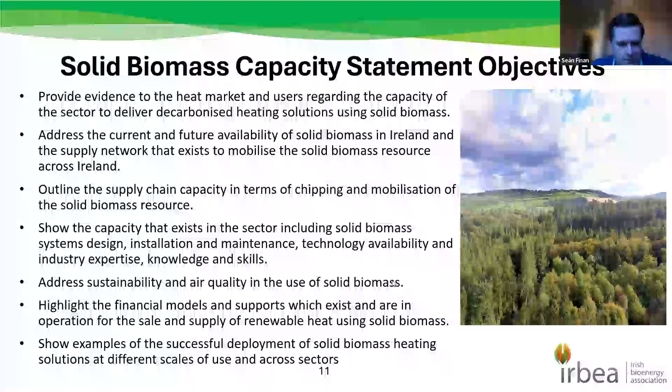The Wood Fuel Quality Assurance Scheme, which is managed and administered by the Irish Bioenergy Association, with NOLA as the auditor, certifies suppliers to ISO 17225. The WFQA requirements satisfy the SSRH, the Support Scheme for Renewable Heat, and the Solid Fuel Regulation requirements. Most recently, IrBEA has engaged with SURE, a German-based certification body, around sustainability certification.

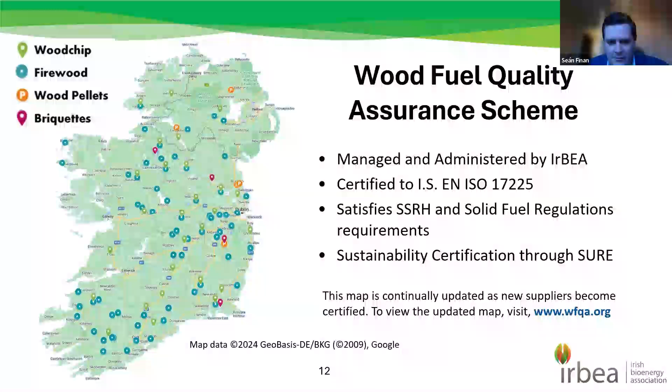It's probably even updated since this was drawn down and put into the slide here. The updated map is available on www.wfqa.org. I'd like to also acknowledge the contribution made by the Department of Agriculture for the promotion of the Wood Fuel Quality Assurance Scheme, and acknowledge that support. Without the department's support, it would not be possible to promote the sector and promote the Wood Fuel Quality Assurance Scheme.

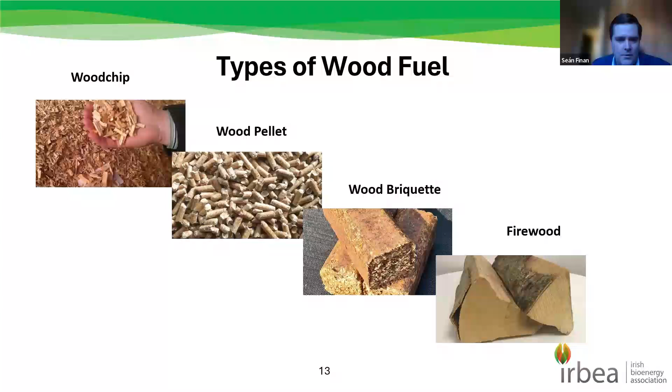Moving on, there are different types of wood fuels. In this document, we focus very strongly on wood chip and wood pellet as options, but also there are wood briquettes and firewood. Firewood is more used at a domestic level, and also wood briquettes at a domestic level, whereas wood pellets can be used at a domestic level but also at a commercial industrial level, and then wood chip at a commercial industrial level also. So those are the four different types of wood fuels which are profiled within the document.

Just to put the role of bioenergy in context in Ireland, but also across Europe and globally, both the IPCC, the Intergovernmental Panel on Climate Change, and the International Energy Agency identify rapid deployment of modern bioenergy and bioenergy with carbon capture and storage as crucial to reducing fossil fuel emissions and achieving net zero. That's outlined within the document, and there's a section on that.

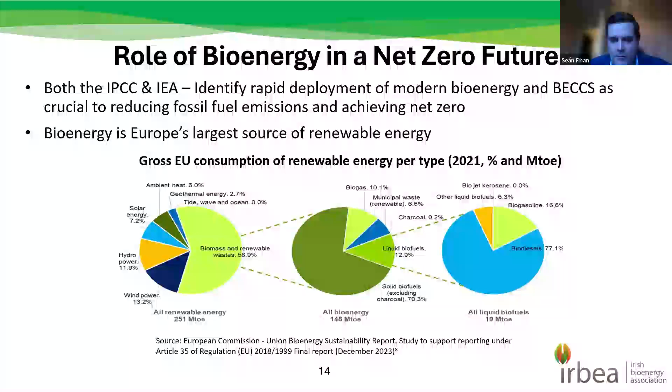But if you look at the heat situation in Ireland, the renewable heat situation, we're at a very low level. The percentage of heat from renewable sources at an EU level is 22.9%, whereas Ireland is at 5.2%. So we're the laggard really from a European perspective, and the lowest in Europe around renewable heat. That shows you the huge opportunity which exists, first of all with the right supports and mobilisation, but also the scale of the effort that's required in order to achieve the targets which are set out for us.

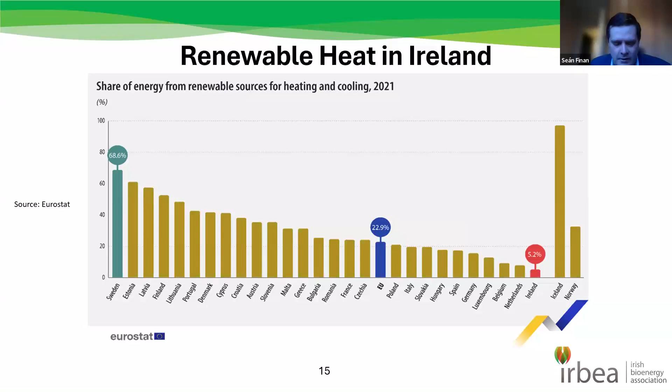And if you compare that to 68.6% in Sweden, where the vast majority of that 68.6% is solid biomass, they have quite a developed supply chain for biomass heating. So it just shows you the large challenge we face on one hand, but also the opportunity that we have as a country to deploy a wide range of technologies to satisfy the renewable heating requirements.

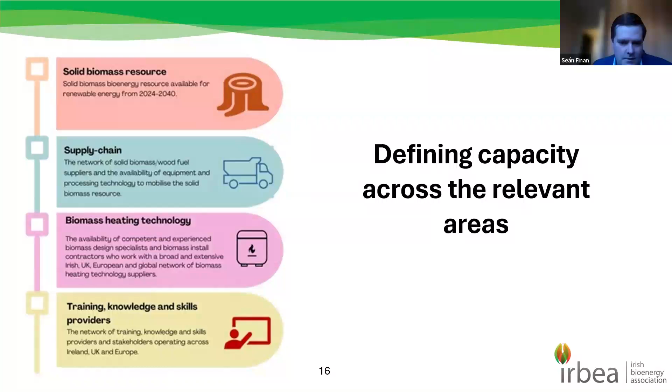Moving on, the document sets out the capacities across the relevant areas. So I've talked about the resource, which Eugene is going to talk to, and Noel will talk to the other three in his slides: the supply chain, the biomass heating, and the training, knowledge, and skills. So now I'd like to hand over to Dr. Eugene Hendrick. Thanks very much to Eugene for all his work and efforts in terms of this report and this statement. Eugene will now present his slides. So over to you, Eugene.

Thanks very much, Sean, and good morning, everybody. I'll just go to the first slide. Before I start, I just want to acknowledge some work that was done, a lot of work that was done in relation to the supply side by Henry Phillips, who is a forestry consultant and who has worked a lot on the national roundwood production forecast that the Department of Agriculture, Food and the Marine issue every 5 years. So most of this work, the actual numbers, are down to Henry.

I wanted to start basically just to outline some of the key points about sustainable forest management and the supply of solid biomass. So in Ireland, it's derived from sustainable forest management practices and techniques. As Sean previously mentioned about SURE certification, under the RED 3 directive, the material has to come from sustainably managed sources.

So it's very important that the solid biomass is derived from sustainable forest management practices and techniques. A lot of the material comes from forest thinning, the removal of specified biomass, which is mainly the residues left after final felling of a forest before regeneration. It's just part of forestry harvesting operations if it's planned correctly, into assortments.

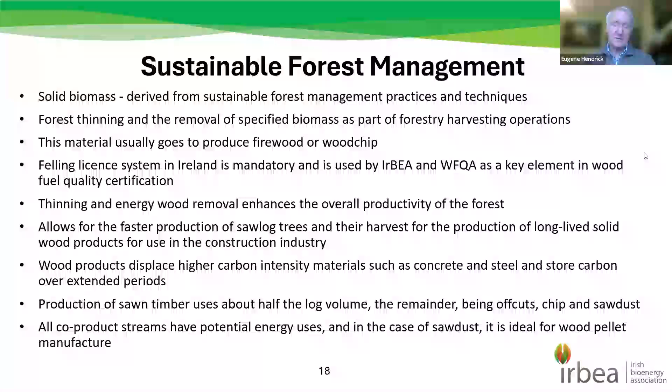There's a table in the report that shows this, and a lot of work went into it - we did a lot of iteration. Sean mentioned there's two COFORD reports coming out. They're not quite ready yet, just about to come out. So there's two reports you'll see on the COFORD website hopefully in the coming weeks.

One is looking at the production numbers in relation to solid forest-based biomass over the period up to 2040. A lot of work has gone into that - we've re-looked at the overall national forecast, and we've looked into the potential for energy from the energy assortment harvest.

The take-home message here is that at the moment, if you look at the SEAI report, which is being published today, the Energy in Ireland and the accompanying data, there's around 10 petajoules, which converts to roughly 1.5 million tons of green biomass being used at the moment in terms of harvest. And most of that material is what's actually produced on the island. There is a small level of import of biomass, but in terms of any energy value, 93% of the biomass supply is sourced on the island. So the vast majority is indigenously produced, sustainably produced.

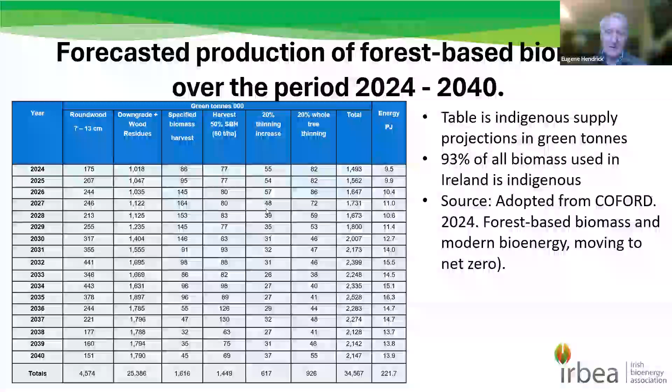Now, the supply is limited, as you can see - there's only so much we can produce, but if you look at the marginal effect, we're talking about increasing from 5 going upwards, we can make a reasonably substantial input into those numbers. So if you're talking about the level of increase that we need, then forest-based biomass has a significant role to play in terms of heating, at all scales nearly, but particularly at industrial and commercial.

We also looked recently, in 2023, at what we call specified biomass harvesting. So this is the material that's left after felling of forests, after clear felling or removal, which is always followed by reforestation - by law, you have to reforest the area that's been felled. So it's a valuable renewable biomass resource.

It's not willy-nilly, you have to plan it out. In this document, the specified biomass harvesting document that IrBEA has published - Noel Gavigan, Ken Worrell, myself and others inputted to this document - there's a system whereby at final felling, you can put aside an energy assortment based on tops and branches, and leave that material on site until the needles have fallen off, then go back in and harvest this material.

When the needles have fallen off and it has dried to a certain extent, it's ideally suited for large scale energy uses, particularly in the heating sector. We have included that assortment in the numbers you've just seen - that system is included, but it can be expanded. I want to emphasize this is sustainably produced, and it might look pretty rough stuff, but it can actually be quite high quality, because the important thing is to have the needles fall off, because you don't want needles.

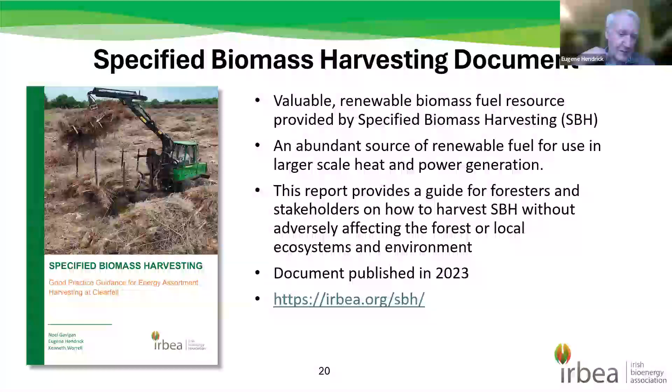There's also potential from other sources to sustainably grow biomass supply further - agriculture, green waste, coppice, short rotation forestry. It's a hard number to put on, but it could be anywhere from 300 to 400,000 tons per annum, in addition to the biomass resource from forestry. There are sustainability issues around site treatment and so on, but it's covered. There's a report that Sean and Noel and colleagues have put together on agricultural green waste and its potential uses. We're not talking here about taking away hedgerows or anything - it's sustainably produced material.

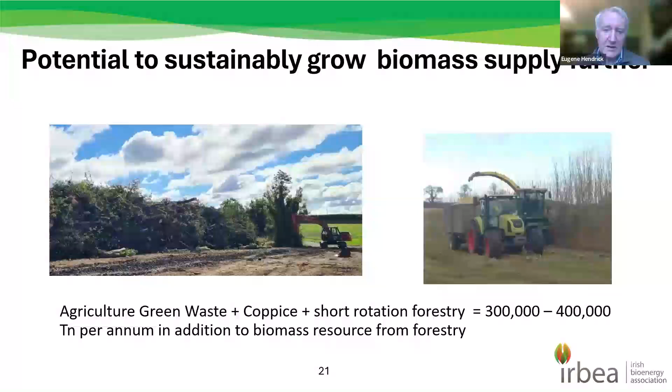So this is, I think, one of my final slides, if not the final one. We can also increase the level of forest-based biomass, or biomass generally, by willow coppice. If we engage in a scheme, if the department relaunched the willow scheme, then we could potentially increase the level - if we plant about 2,000 hectares of willow a year, we could eventually reach, by 2040, an annual production approaching 20 petajoules, which would be quite a significant input to energy provision, renewable energy. So I think that's all my slides.

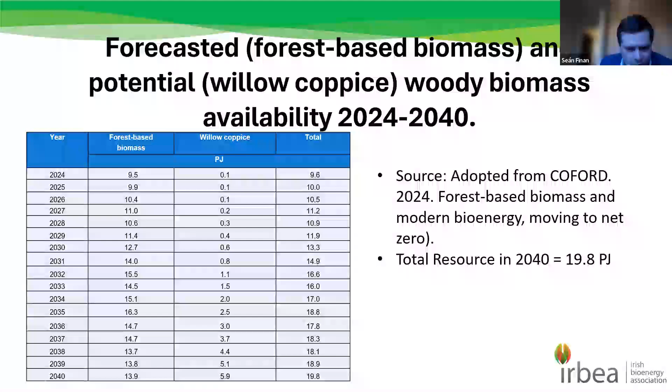Yeah, we can. Okay, now so again, just to go into the supply chain, I suppose one of the main purposes of this report was to show the capacity of the industry in Ireland and abroad in terms of meeting this demand, and is this logistically possible. So the first thing we look at is the supply chain of raw materials, also looking at the design and installation capacity of the actual equipment itself. Within the report, we're looking at what the capacity is within Ireland.

First of all, in terms of the wood fuel supply network that exists, we have, as seen from the map earlier on, a large number of suppliers around the country that are of significant scale, already supplying industrial levels of biomass to industrial facilities, commercial facilities, and to the domestic sector. So there is ample capacity there to produce that material. We have the know-how, we have the equipment to do so, and we have, as Eugene has pointed out, the raw material as well. So that was the first part of it.

The next thing then is in terms of designing and installing plant. First of all, the plant itself - the boiler systems are at this stage a very well developed technology. As from Sean's earlier slide, the largest proportion of renewable heat in Europe is actually provided by biomass, and that technology is very well developed. There are numerous manufacturers across Europe, but also we have a number of them here in Ireland as well, at both small and large scale. So there is capacity there. There's plenty of examples around Europe and in Ireland of existing plants, and the report itself lists some of those examples at the end, Irish-based examples.

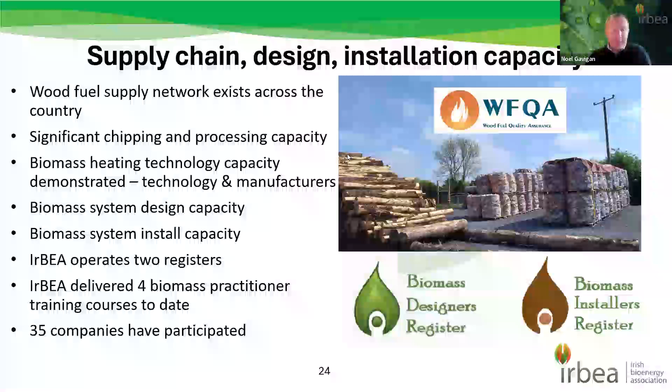Want to go on to the next slide there, Sean? In terms of the annual requirement for biomass, there's a relatively simple formula for this. We've just got some examples there in terms of the boiler size.

Typically your hotels or commercial units would be say 250 kilowatt or 500 kilowatt up to a megawatt. So if you're using wood chip or wood pellet, there's a certain level of tonnage you require on those. That's just an indicator based on a certain number of hours. Going into your large industrial plant, there are examples in Ireland at the 5 and 10 megawatt scale, and larger than that again. There's up to 20 megawatts, and one larger than that in the country. So those are the sort of tonnages they'll require on an annual basis.

The annual requirement is a function of a number of different factors, and we have a formula there which is relatively easy for anyone in industry to work out. It's basically the boiler size in kilowatts multiplied by the annual hours, divided by the fuel energy content multiplied by the efficiency of the boiler. Industrial plant will tend to run for 8,000 to 8,500 hours a year, whereas your space heating plant might only be working for 1,500 hours, so there's quite a difference in terms of quantity. It's a relatively simple formula to work out and easy to determine the quantities required.

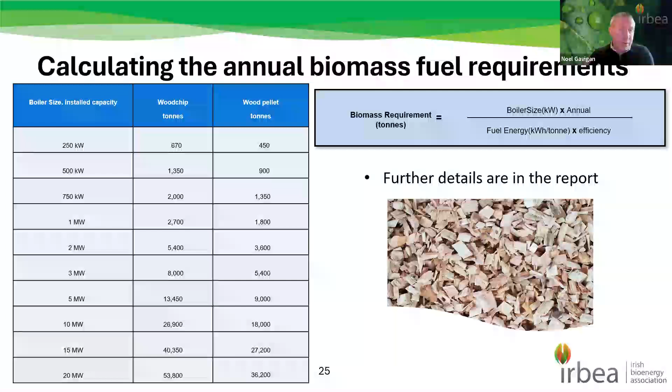That leads into the raw material, in terms of sourcing that material. Going back to what Sean was saying earlier about SURE and the sustainability side of it, the RED 2 directive and becoming the RED 3 directive - there were questions over the sustainability of biomass a couple of years ago. The RED 2 and RED 3 directives have really done a huge job determining the exact criteria you need to ensure it's done correctly, and we're finding it's a very robust system. It's been changed from RED 2 to RED 3, so anywhere there were a few issues, the biomass system now is one of the most highly viewed and regulated in Europe. We're quite happy with that. So all material going forward will need to be certified for sustainability for the larger plant.

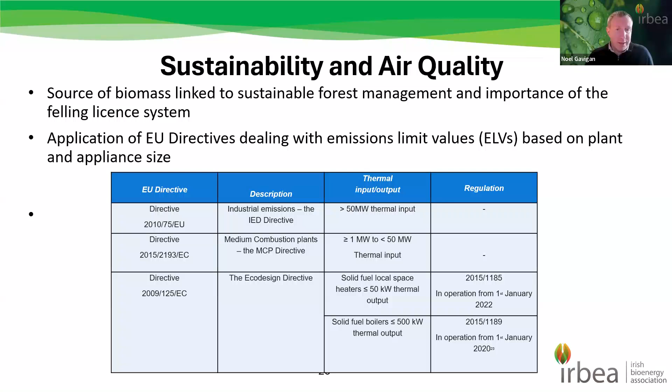In terms of sustainability and air quality, there are a number of directives that stand over this - I'd mentioned the RED 2 directive already. The directives we've listed there relate to emissions. The other question that often comes up is, well, what about emissions - be it particulates or smoke, that's usually the issue. At this stage it's been an engineering issue, and we've been able to engineer out the emissions largely from industrial plants in particular. You can put in mitigation measures - it's all to do with how your combustion management works, your fuel quality, but also your post-combustion flue gas treatment, and you can bring those right down in level. That's controlled under the IED directive for larger plants, the medium combustion plant directive for the plant we generally tend to see in Ireland, and on the domestic side you have things like the Eco Design Directive, which sets standards from everything from stoves up to boiler systems for small commercial plant. So they're very robust in how they've done it.

So the main steps you'd need to look at when considering a project - and this report is there to support this - first of all, in designing a system, the first thing you need to do is assess your heat demand and the needs. The key things you need to look at there are, first of all, the temperatures.

So are you looking at space heating? Do you want 70 degrees or 80 degrees, or are you looking at industrial heating? Do you want 250 degrees of steam? You want all of that to be easily provided by biomass. But obviously that's a major factor.

The other thing is the load profile. Is it something where you need a steady demand of heat throughout the day and throughout the year, or are there peaks and troughs throughout the demand cycle? Are those peaks and troughs on an hourly basis, or are they on a monthly basis? All that needs to be looked at before you can design your system.

But all very valuable information to ensure that your plant runs efficiently. And all of that can be gathered from either the plant design itself, whatever you need the heat for, or from previous heat usage.

In terms of the planning itself, there's plenty of information out there for planners. We've actually produced some documents to assist with the EPA requirements as well. So it's quite a well-known stage with the EPA.

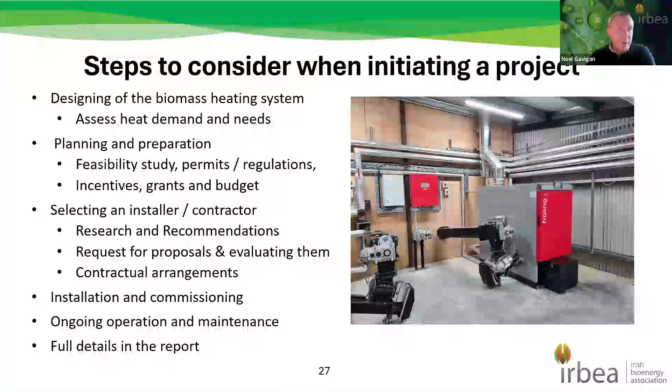You get outline planning permission in general for what the plant will look like. It's important, from your own perspective and from everyone's perspective, that you get somebody reputable, experienced, and who knows what they're doing—going back to designers and installers registers, going back to manufacturers, to make sure there are plenty of examples they will have out there to look at. We would recommend that you spend a bit of time selecting the correct contractor and correct people to do this.

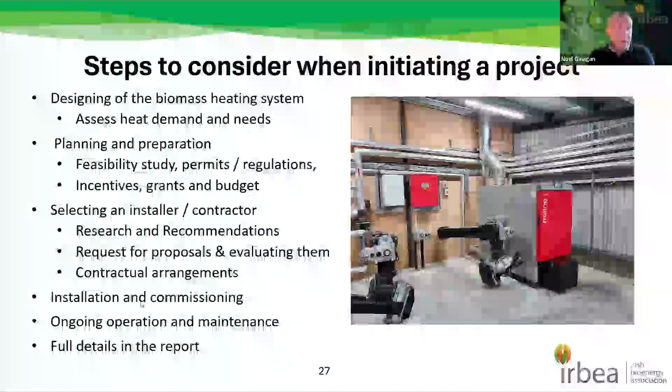So within that, you want to look at the installation and commissioning, the ongoing operation and maintenance of the plant itself, and just the general running of it.

So just finally then, to look at some of the biomass heating and supply contractual arrangements. There are three different general approaches we see. One is an owner-operator approach.

Basically, you are going to contract somebody to install the system, and you are then going to fuel it, operate it, carry out the maintenance, and manage it. You'll see that a lot in smaller operations, or in operations where they have a lot of experienced personnel on site. Sawmills, for example, might often take on a lot of that work themselves because they have the staff to do it.

The second option you would see is where it is owner operated, but they will have external maintenance contracts, usually with the initial installer, to maintain the plants, with certain arrangements made for that. And the final one we would see is ESCO supply contracts.

Just want to click on the first one there, Sean. So I suppose that's a standard system you would have seen where you had an oil tank, oil boiler feeding into a system. I'll click it on again there. In this scenario, we're putting in a chip store or a wood pellet store with a wood chip boiler. I'll click on again there, please, Sean. And that supplies into the building itself.

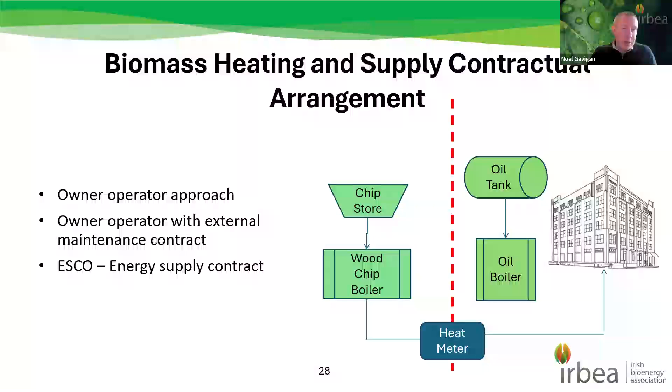Now, with an ESCO supply contract, in this diagram, the ESCO supply contract is represented by the red dashed line. What happens there is your ESCO company will come in, they will put in the chip store and the chip boiler, they will have built it, they will manage it, they will operate it, they will fuel it, and there will be a heat meter.

The only thing that the heat user needs to see is a heating bill. They're not concerned with what's on the other side of the red line. They're just paying a heating bill based on how much heat they actually need, and all of the management of the system itself is handled externally.

It's not something that they need to be involved in. That tends to suit very well to certain facilities like hotels - their main business is not operating a boiler, it's running a hotel. So they tend to like contracts like that because they just want heat on demand, and it suits their business portfolio as well.

That's just some of the basis of it. You'll find it all supported within the report as well, so it's geared towards the user. I'll hand you back to you, Sean.

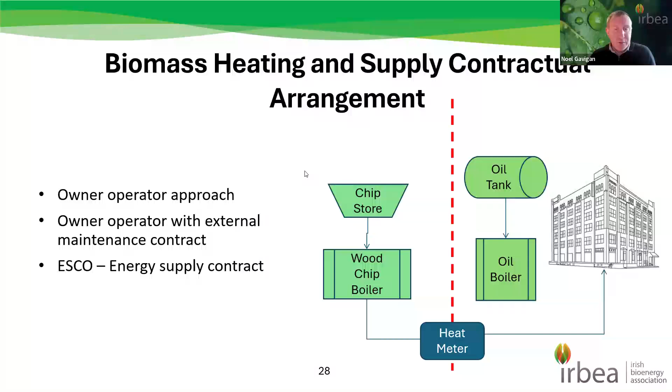Okay, so I'm going to present now just a couple of slides that our colleague Stephen was supposed to present this morning. So really, it's just the document - the report outlines some of the financial supports available for biomass heating.

The main support available for biomass heating systems is through the Support Scheme for Renewable Heat, which has been in operation for the last number of years. It is an operational support for biomass heating systems, and it also provides support to biogas fuel systems plus heat pumps as well. It's administered by the SEAI, and full details are available on the SEAI website. If anyone wants further information about the SSRH, they should get in touch with us, and we're happy to provide that information and any information that you require.

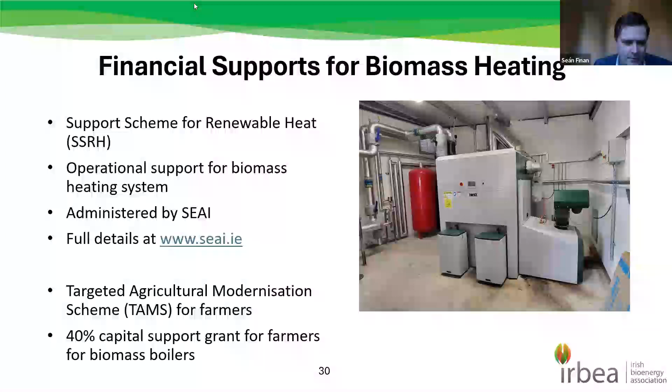In addition, the report outlines some specific support available to farmers through the Targeted Agricultural Modernisation Scheme - a 40% capital grant for farmers for biomass boilers. This is different to the SSRH in that the SSRH is a 15-year operational support, whereas this is a capital grant. By and large, we have moved away from capital grants for boilers because in the past we've had capital grants and the boilers were turned off depending on how fossil fuel prices fluctuated. So generally, operational support is favoured in terms of biomass systems.

Moving on, the document outlines some of the relevant policy measures and documents out there at the moment which point in the direction of the need for biomass heating to solve a lot of our decarbonisation challenges. Earlier this year, around May or June, the Department of Enterprise, Trade and Employment published the roadmap for the decarbonisation of industrial heat. This identified pathways for the decarbonisation of industrial heat by renewable sources. Biomass was identified alongside biomethane and electrification as the favoured technology options. We're happy with this report - there are some aspects we've highlighted to the department that we'd like looked at, but by and large this indicates a growing awareness and acknowledgement that biomass plays a significant part as a solution to industrial heat decarbonisation.

The Climate Action Plan is another document you would all be familiar with. It sets out how Ireland meets its climate action targets, including the role of various different technologies and fuels, including biomass. Our issue with the Climate Action Plan over the last number of iterations is that it has been quite specific on certain technologies and hasn't given biomass the focus it requires and the potential solution it provides. So we look forward to seeing future iterations of the Climate Action Plan being further advanced from the perspective of utilising more bioenergy solutions for decarbonisation of heat.

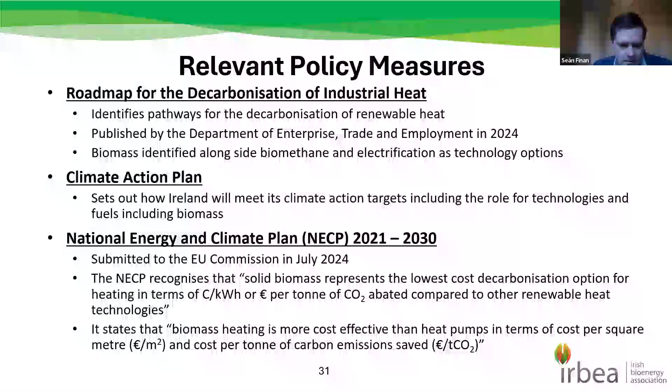The other piece of work which we're near finalisation of, and I know some members on the call will have probably heard a few times, is a cost and carbon abatement analysis done by XD Consulting. We're at the concluding stages of finalising this. The model was quite complex, we had a few problems with it, and we've addressed those.

So what this piece of work does is compare the various different decarbonisation options for heating our homes, commercial buildings, and industrial processes. It compares them on a cost and carbon basis, with the report focusing on the financial cost as a function of capital and ongoing expenditure, while examining the greenhouse gas emission reduction achieved through the various renewable fuels available. That will generate a financial cost per ton of CO2 equivalent saved over an extended period of time.

And what the report is really saying is that biomass as a renewable fuel option is competitive from a cost and carbon abatement perspective across all scenarios modelled. It's quite interesting how certain factors have a big influence on those costings. We will be publishing this report shortly.

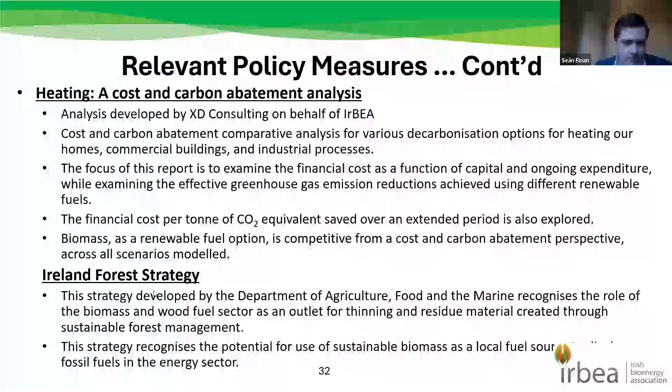The final document referred to in the report is Ireland's Forest Strategy, developed by the Department of Agriculture, Food and the Marine. It recognises the role of biomass and wood fuels as an outlet for thinning and residue materials created through sustainable forest management, and the potential use of sustainable biomass as a local fuel source to displace fossil fuels in the energy sector. So those are the documents and relevant policy papers currently of note to the solid biomass sector, detailed within the report.

Finally, I'm coming to the end, I think this is my last slide. It's just to say that the document outlines 12 different case studies. As you can see, the case studies outlined are one, or in some cases two, installations per sector. This is just to prove that biomass is currently being deployed right across all the different sectors which exist within our country, from dairy processing.

There's an example there of a healthcare facility using biomass. We have industrial manufacturing using biomass in CJ Sheeran's. There are two horticulture applications: Horswood Nurseries, Wexford Tomatoes, and O'Hanlon Herbs. We profile St Mary's College Drumcondra as an education sector case study, Teagasc Oak Park as a public sector case study, and in the leisure sector, the Watershed in Kilkenny, also a biomass user. Then we have two agricultural sector ones, one in poultry and one in animal nutrition.

And then you move on to the larger scale, which is Astellas, based in Kerry, in the pharmaceutical area, and then in the hotel and tourism sector, An Chúirt in Donegal. So we really appreciate all of these companies agreeing that their systems would be profiled over two pages per case study, right across these sectors. We also thank the installers and designers who helped and assisted in providing the technical information associated with each of these systems. They can all be read in the document itself.